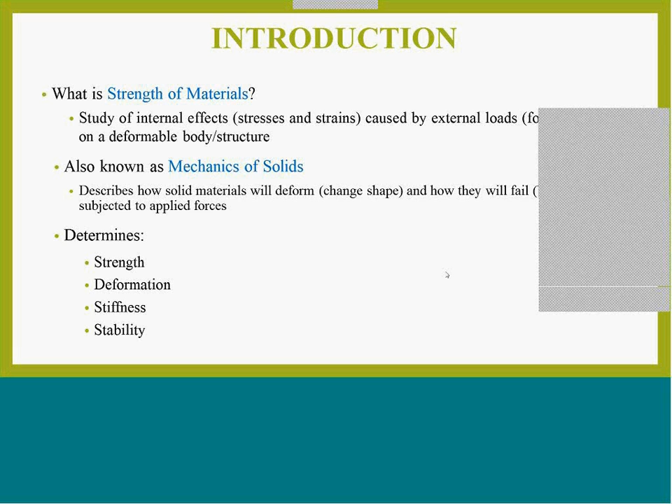In stability, actually its ability to avoid rapidly growing deformation caused by initial disturbance, like buckling.

There are three major principles in which load may be applied. First is tension, compression, shear. However, in engineering, many loads are torsional rather than shear.

So in tension testing, also known as tensile testing, this is a fundamental material science test in which a sample is subjected to a controlled tension until failure. The results from this test are commonly used for applications like quality control and to predict how material will react under other types of forces.

So by pulling on something, you will very quickly determine how the material will react to the forces being applied in tension. So as the material is being pulled, you will find its strength along with how much it will elongate or lengthen.

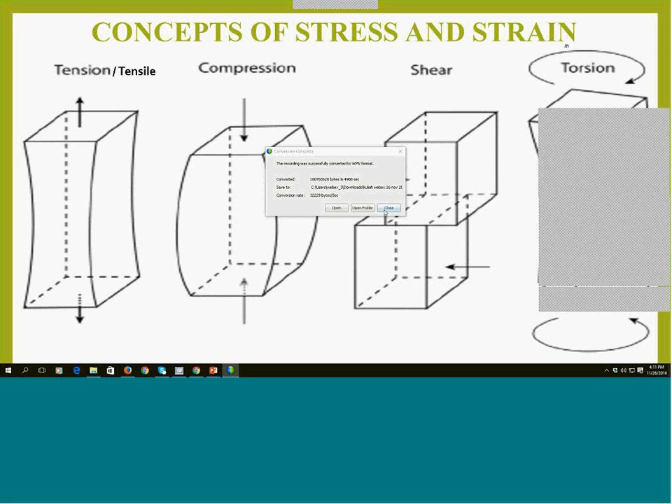This is the definition of stress and strain, where stress is force over area, and strain is elongation of material relative to its original length.

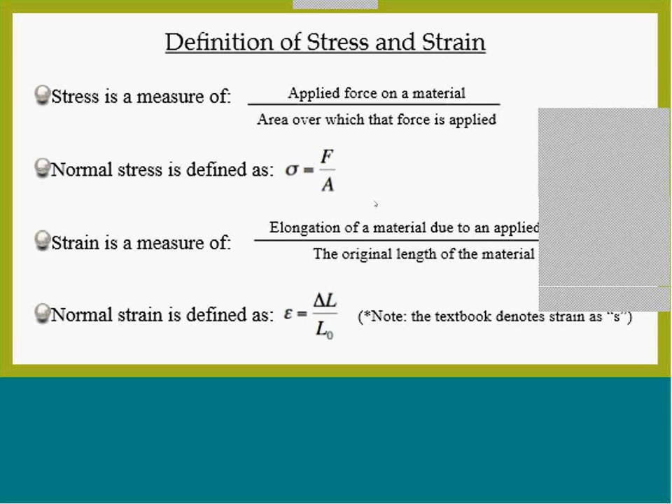Okay. When a force is transmitted through a body, the force tends to change its shape or deform. The way in which the body deforms depends on the type of force applied to it. So generally, stress is force divided by area.

In tension and compression, the test area is perpendicular to the force. In compression, the stress acts to shorten an object, while in tension, the stress acts to lengthen that object. These two, compression and tension, are also called direct force, direct stress, or normal stress.

In shear or torsional tests, the force is parallel to a surface.

So it can cause an object to slide over another, and it tends to deform an originally rectangular object into a parallelogram. Or the most general definition is that shear acts to change the angle of that object.

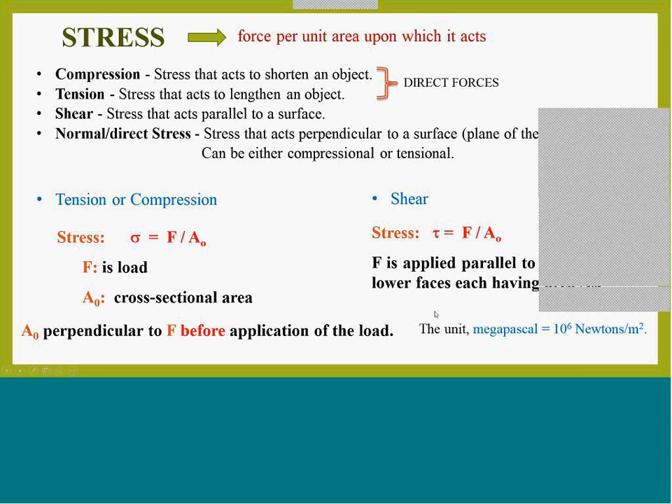So this is the formula. Tension or compression stress, sigma, equals force over the cross-sectional area, where the area is perpendicular to the force. In shear stress, tau equals force over area, where force is applied parallel to the area. The unit is in megapascal or in newtons per meter square.

Or we can summarize it in this slide.

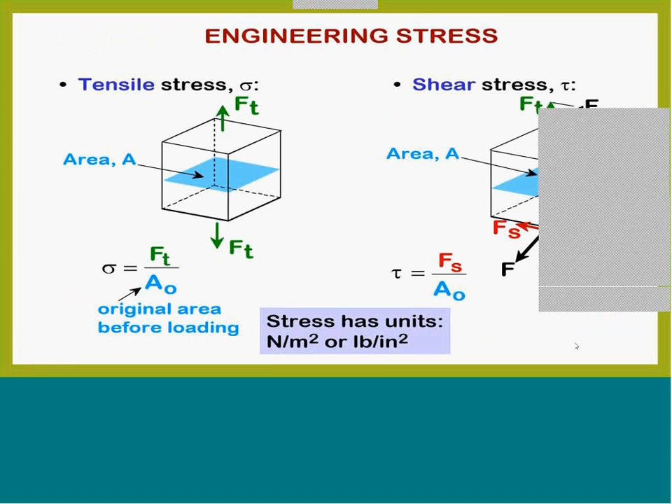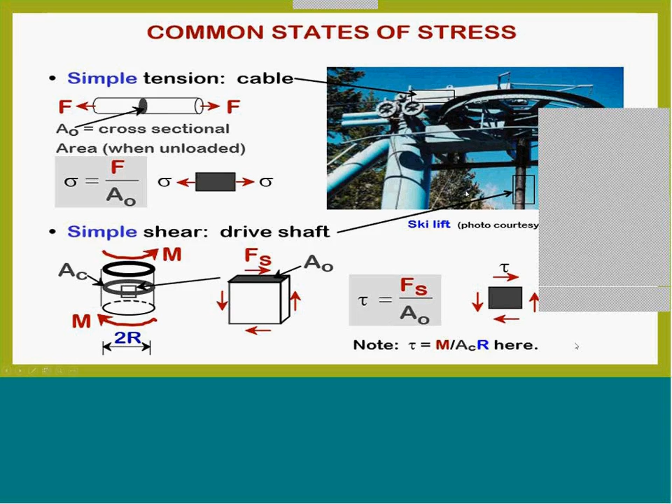Okay, common state of stress. The common example is in a ski lift. The simple tension we can see in the cable, where in simple shear we can see in this drive shaft area. And for compression, the simple example is on the balanced rock as well as the bridge.

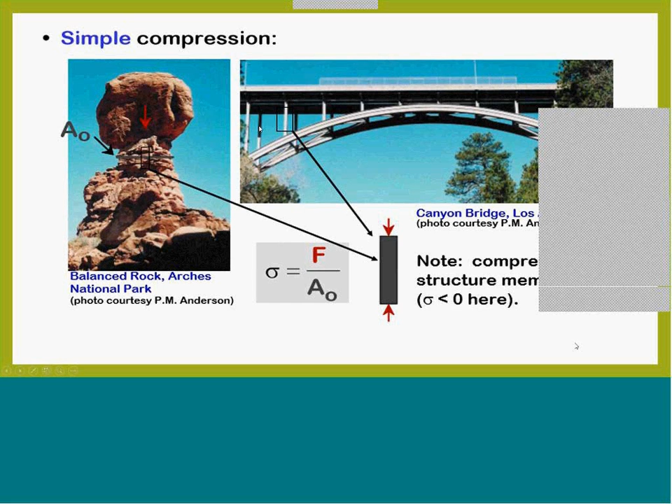Okay, for strain. When loads are applied to a body, some deformation will occur, resulting in a change in dimension. The strain can be defined as the amount of deformation an object experiences compared to its original size or shape.

In compression, longitudinal strain shortens the object, while in tension it lengthens an object. In shear, the strain changes the angle of an object, and that causes the line to rotate.

As strain is a ratio of length, it is dimensionless, no unit, and is measured in radians. Note that if the strain is positive, it shows an increase in dimension, and if negative, it shows a reduction in dimension.

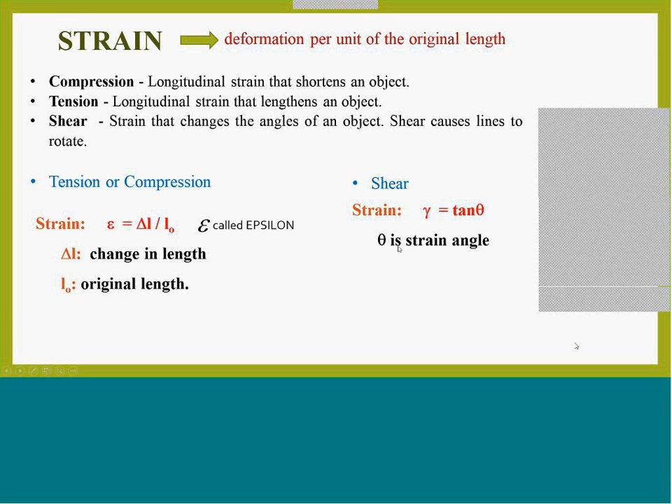For tension or compression, strain is equal to this formula, ε, called epsilon, where in shear, the strain is described by this formula: gamma equals tan theta, where theta is the strain angle. Or we can summarize it in this slide, the formula.

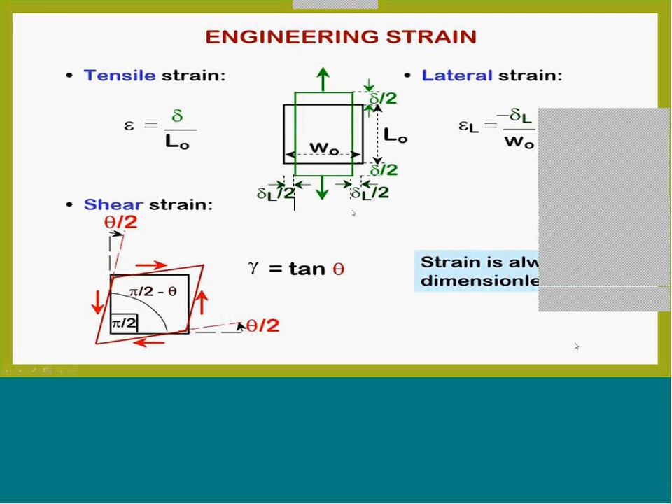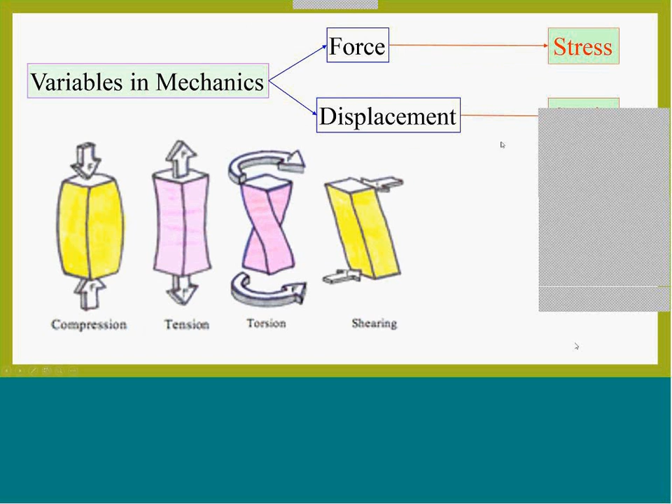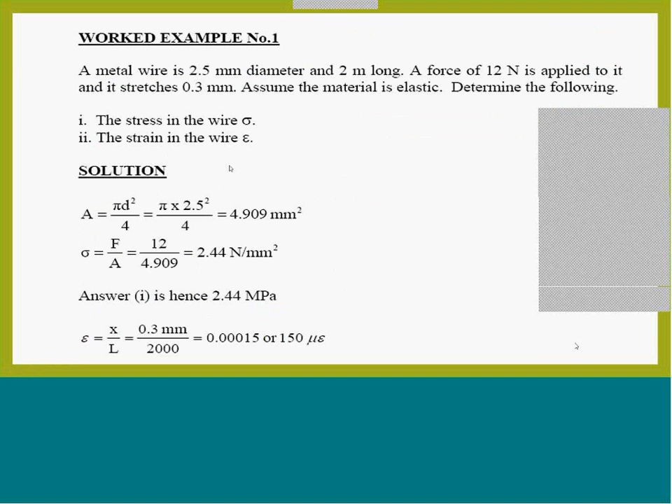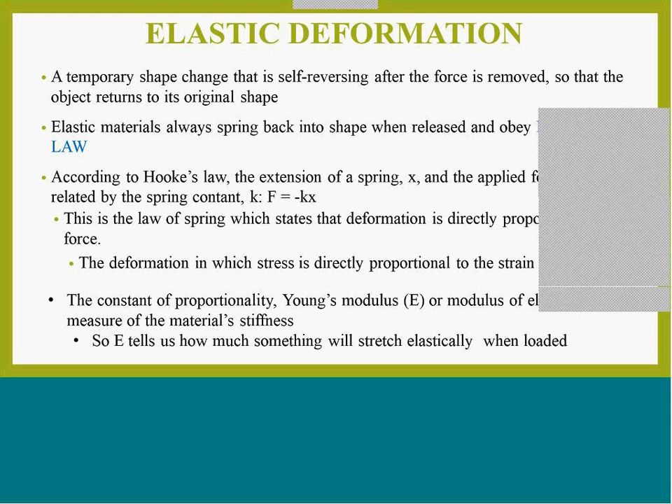Okay, the first portion of the graph will be a straight line. The slope is the elasticity, or the Young's modulus, the stiffness, and it measures the stiffness of the material. The stiffness is different for different materials and different sizes of the material.

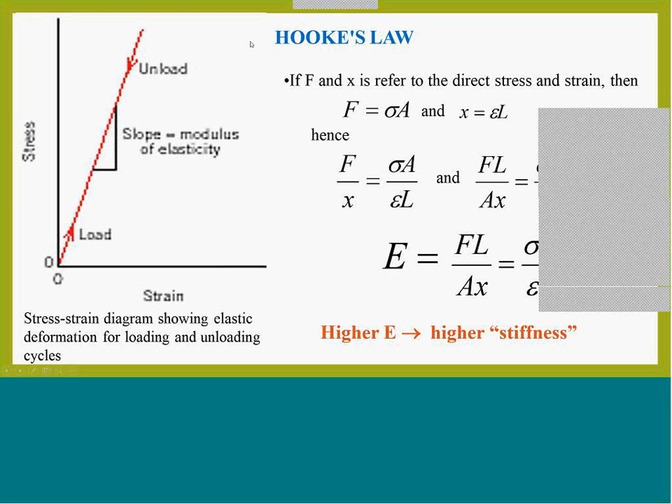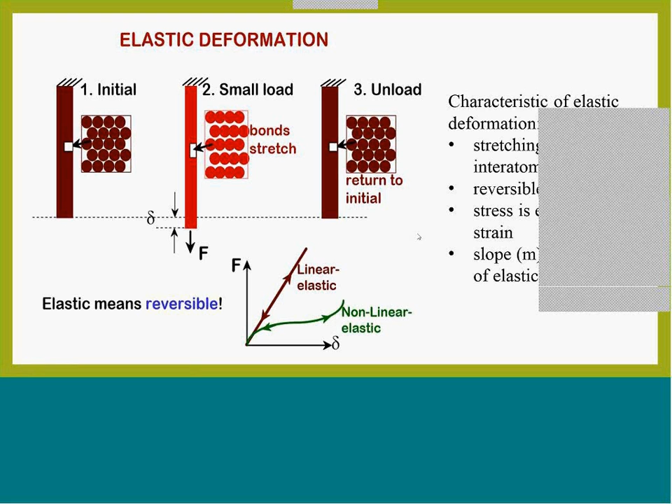Okay, this is an example for elastic deformation.

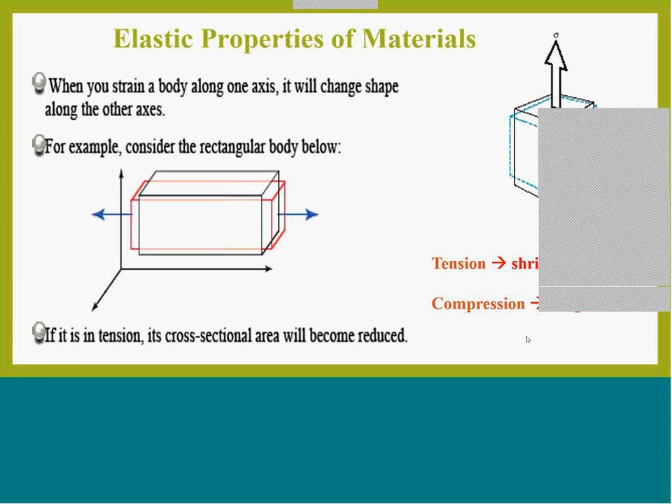If it is in tension, its cross-sectional area A will become reduced. So if material is subject to tension, it will shrink laterally. Those subject to compression will bulge. So the ratio of the lateral and axial strain, or longitudinal strain, is called Poisson's ratio.

Poisson's ratio defines how much strain occurs in the lateral direction when strain occurs in the longitudinal direction, the Z direction. Note that nu is dimensionless.

Theoretically, Poisson's ratio for isotropic material is 0.25, and the maximum value, or the value for which there is no net volume change, is 0.50. For many metals and alloys, the value of Poisson's ratio is in the range of 0.24 to 0.30.

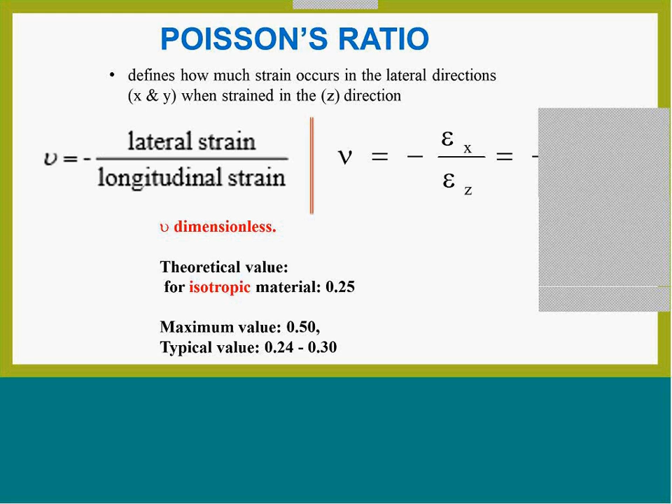Okay, another elastic property is shear modulus. Shear stress to shear strain can be represented by this formula, tau equal to G gamma, where gamma is the shear strain. G is the shear modulus, also the slope of the linear elastic region of the shear stress-strain curve.

The elastic modulus, shear modulus, and Poisson's ratio are related by this formula: E equal to 2G times 1 plus nu. The unit is Newton per meter square.

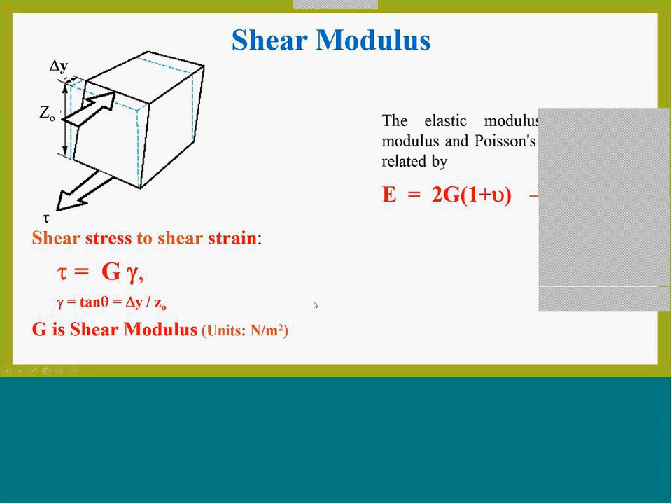This is some properties of material, for metal: properties of Young's modulus, shear modulus, Poisson's ratio, yield stress, and elongation.

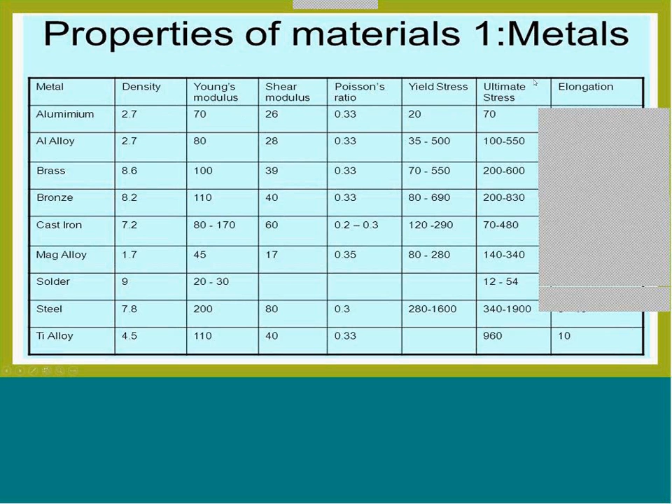Okay, for plastic deformation: plastic deformation is when the stress is sufficient to permanently deform the metal, so it's called plastic deformation. Characteristics of plastic deformation: stress not proportional to strain, and breaking and reforming of new bonds when deformation occurs. It's non-reversible and permanent damage.

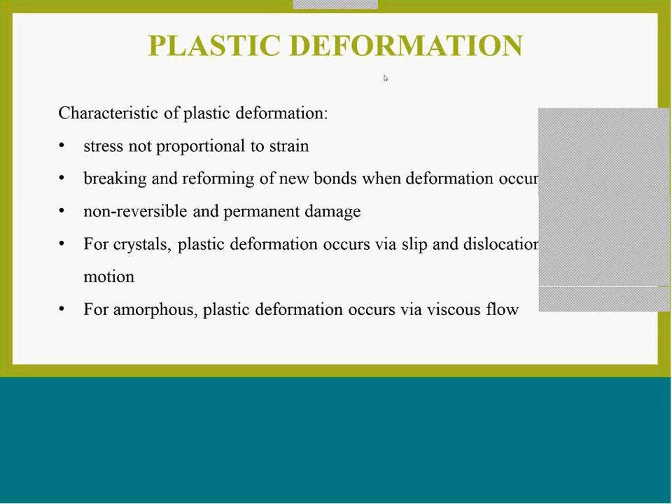For crystals, plastic deformation occurs via slip and dislocation motion, while for amorphous or non-crystallized materials, plastic deformation occurs via viscous flow.

So in plastic deformation, initially the atom is in this state. When force is applied, the bond will stretch and the plane will shear. After the force is removed or unloaded, the plane still remains sheared. So plastic means permanent deformation.

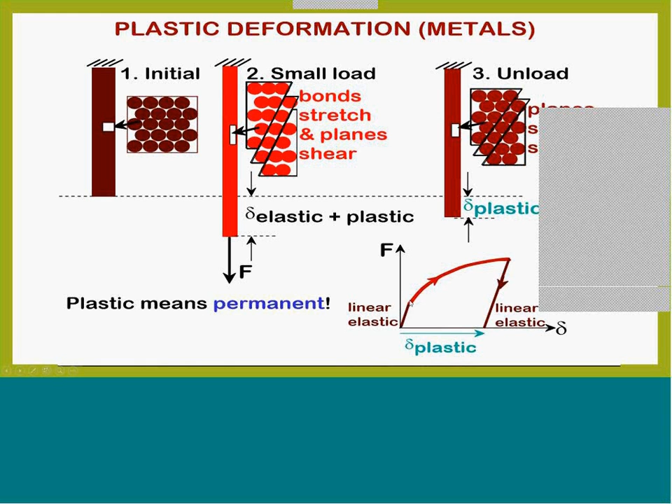As you can see at this area, this is where plastic deformation starts, beginning at this point. This point is called the yield point or the proportional limit, where strain diverges from being proportional to stress.

The phenomenon of yielding occurs at the onset of plastic or permanent deformation. This point of yielding is determined as the initial departure from linearity of the stress-strain curve. The position of this point, point P, is difficult to measure.

To overcome this, a straight line is constructed parallel to the elastic portion of the curve at some specific strain offset, usually at 0.002. This is called the 0.002 strain offset technique.

The yield strength is given by the intersection of this line and the stress-strain curve as it bends over in the plastic region. This is the yield strength: the intersection of the parallel line using the 0.002 strain offset technique.

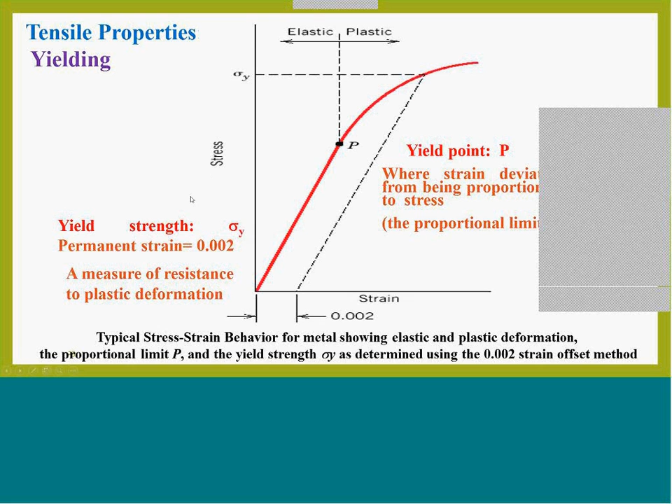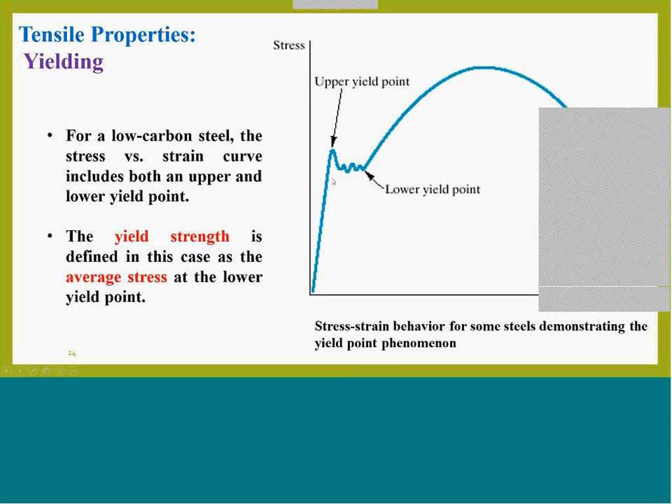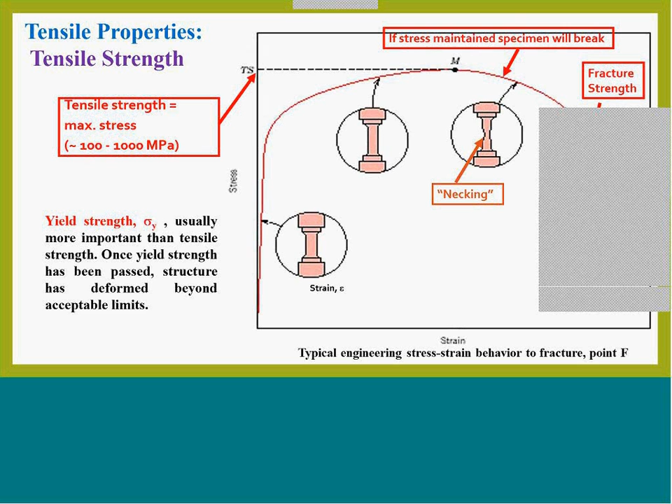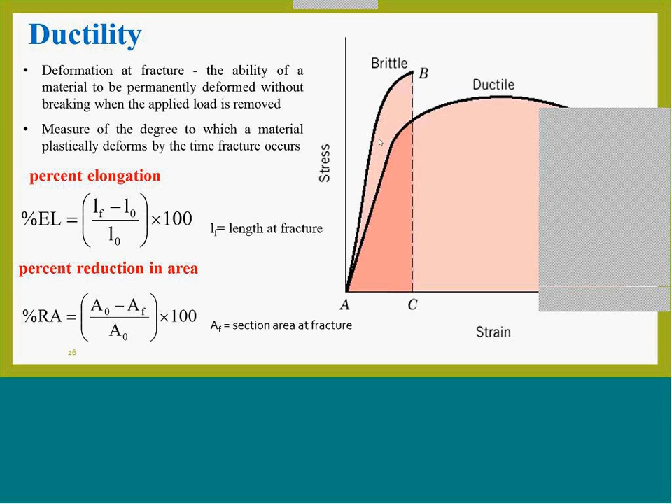Ductile materials deform much more than brittle materials. Brittle material fails suddenly, usually with no prior indication that collapse is imminent. On the other hand, ductile materials such as steel normally undergo substantial deformation called yielding before failing, thus providing a warning that overloading exists.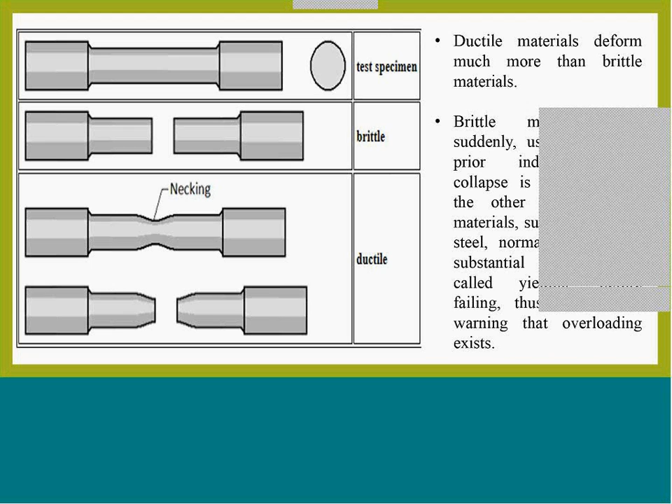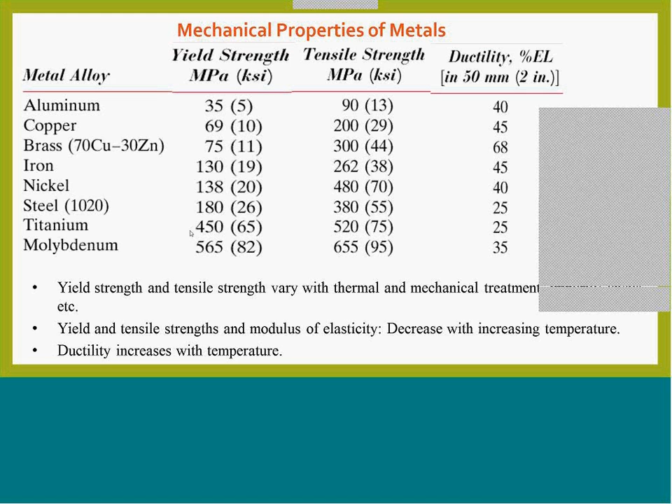For toughness, this is the ability to absorb energy up to fracture. It's actually the area under the stress/strain curve up to fracture. Material resistance, or material resistance to fracture when a crack is present. Its unit is energy per unit volume, joules per meter cubed.

Ductile metals are normally tougher than brittle metals. As you can see in the curve, even though the brittle metal has higher yield and tensile strength, it has a lower toughness due to the smaller area under the curve compared to the ductile area. That's why ductile metals are normally tougher than brittle metals.

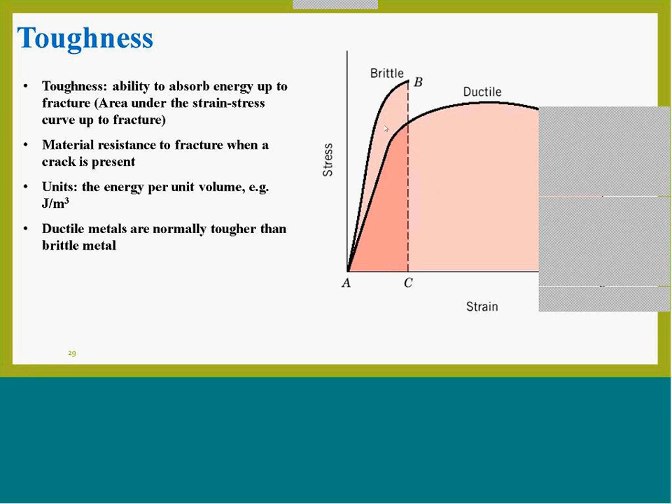So these are some examples of materials: smaller toughness like ceramics, larger toughness like metals and PMCs, and smaller toughness like unreinforced polymer.

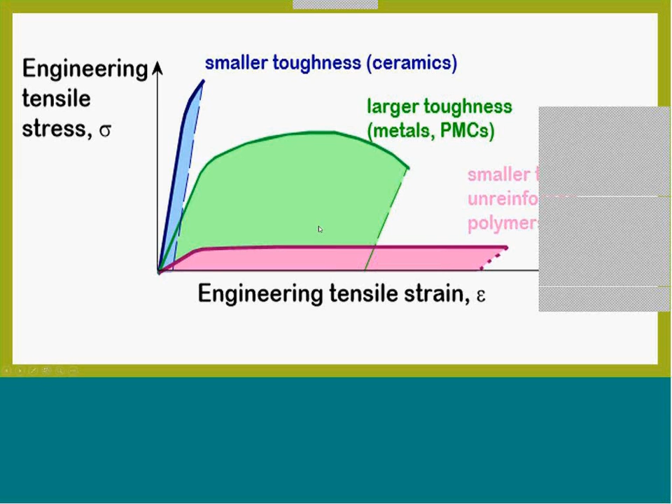So hardness. Hardness is resistance to permanently indenting the surface. Larger hardness means resistance to plastic deformation or cracking in compression, and it actually means better wear properties.

There's some material ranking from lower to increasing hardness. Plastic has lower hardness and diamond has larger hardness. Smaller indents mean larger hardness.

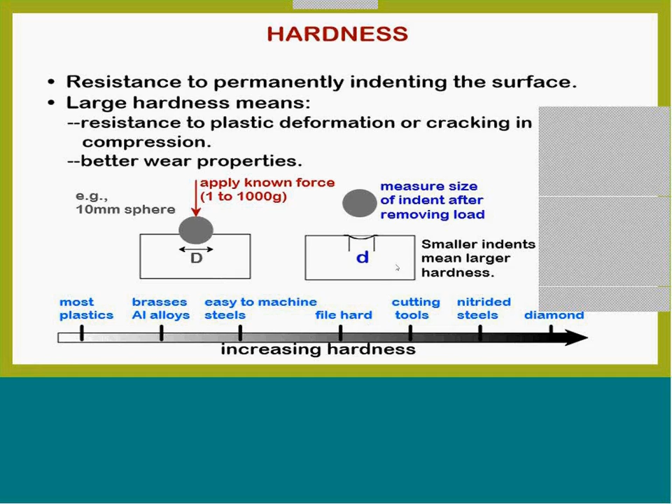Hardness can be tested by the Rockwell hardness test, Brinell hardness test, and micro-indentation hardness test. The Rockwell hardness test is the most common. In this test, various indenters are forced into the material surface, based on different indentation depths. In Brinell hardness, hard spherical indenters are forced into the material surface, and it determines the indentation size.

So in Rockwell, various indenters are used. In Brinell, a spherical indenter is used. Rockwell is based on indentation depth. In Brinell, it's based on indentation size.

In the micro-indentation test, the test involves Knoop and Vickers tests. Here, a pyramidal shaped indenter is forced into the material surface, using less force than Rockwell and Brinell. Normally it's used to measure brittle materials like ceramics.

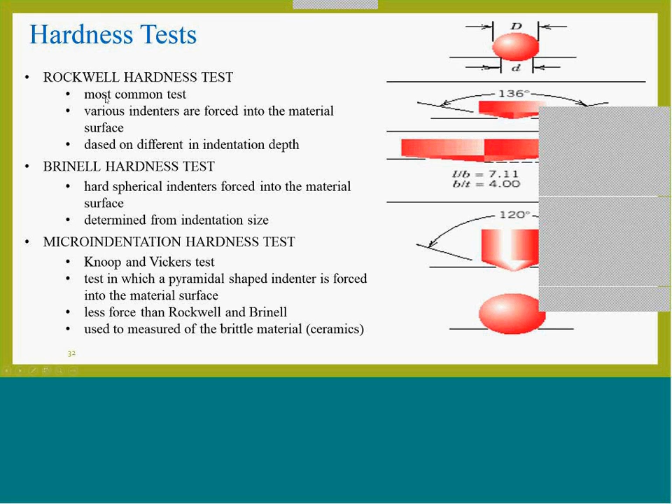This is the graph of the relationship between tensile strength and hardness for steel, brass, and cast iron. As you can see, hardness is proportional to tensile strength. This proportionality constant depends on the material.

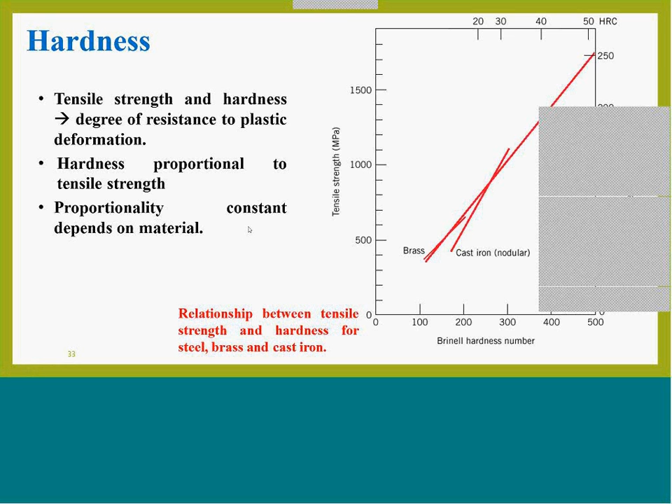Hardening: an increase in yield strength due to plastic deformation. The characteristic of this strain hardening is the hardening in the material as it undergoes plastic deformation. Materials become stronger during strain hardening due to the creation of dislocations. Higher strain hardening represents higher ductility.

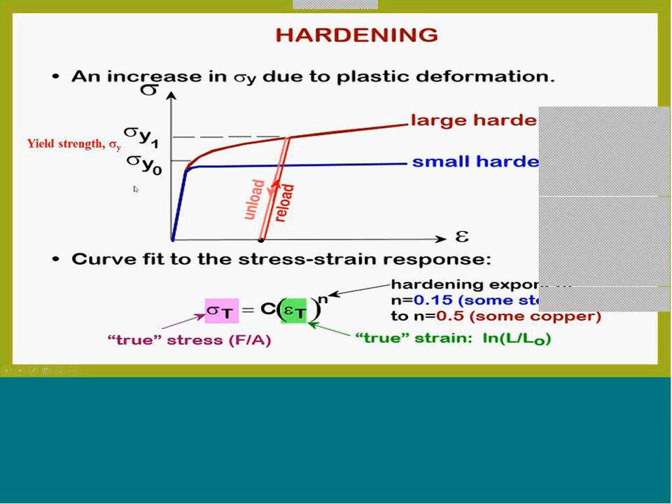When tough materials are used, design stress is taken as the calculated stress level multiplied by a design factor. Design stress accounts for design uncertainty, meaning that we do not push the limit.

The safe stress or working stress, σw, is used based on the yield strength of the material. For ductile material, working stress is dependent on yield strength and factor of safety, as in steel and alloy. In engineering design, yield strength is the important parameter.

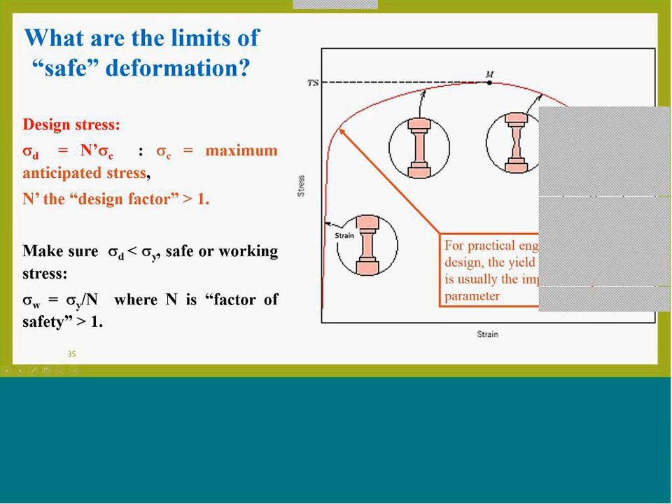This is some example for design or safety factor. Design uncertainty means that we do not push the limits. Factor of safety N is normally between 1.2 and 4. So the design safety factor is important in engineering design.